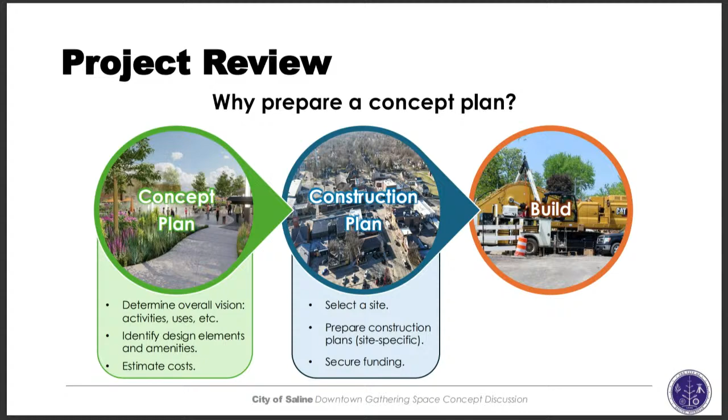So what exactly will you be getting by the end of this process? Well, as Ben mentioned, we'll be preparing both 3D renderings of the gathering space, as well as a conceptual site plan, which is a top-down aerial view of what the gathering space will look like. We'll be completing and sharing with you our assessment of the existing location options in the city's downtown, so you can account for those in making your final decision about if and when to proceed.

And we'll also be giving you some preliminary cost estimates. Through this process, you'll be identifying generally the ideal or preferred amenities and materials that you'd like to include in the gathering space, and that'll help us and you come up with some actual numbers that you can scale to different sites, depending if you pick different locations, but it'll at least give you a starting place to come up with actual cost estimates.

So when we originally proposed this project, we thought of it in 3 major steps. The first was to complete the downtown existing conditions assessment, which we've already done. The second was to hold 2 focus group meetings with elected and appointed officials, as well as downtown business owners, property owners, and members of the community to get their feedback about what they felt this gathering space should look like. With that input and in consultation with staff, we prepared a first draft of a concept plan, which we'll be presenting to you tonight.

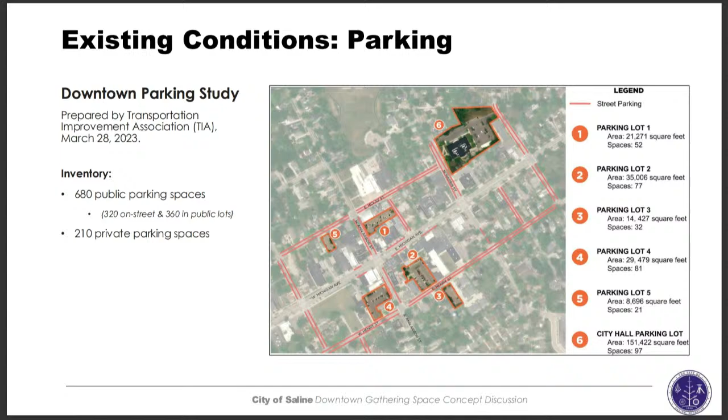With parking aside, we considered 4 major criteria when evaluating the currently available location options. The first was the dimensions and physical features. The next was pedestrian linkages, or sidewalk connectivity and accessibility. The next were encumbrances, any legal restrictions that could limit what the city could do with the property, and activation potential—is it open, visible, and could it be integrated into the greater sense of place of the downtown.

In short, in our assessment, the City Hall lot and Lot 5 are too far from the downtown center to really be activated in the way you'd want. Lot 3 is needed, as we're told, for water tower access, so that limits the use of that site. Lot 1 is relatively narrow and disconnected, being between the backs of 2 buildings on either side. Lot 2 is heavily encumbered, so using that property for anything other than parking would be challenging, which leaves Lot 4 as still being the most viable location as of now for a gathering space. So with that evaluation done, we used Lot 4 as the basis for these conceptual discussions with the focus groups.

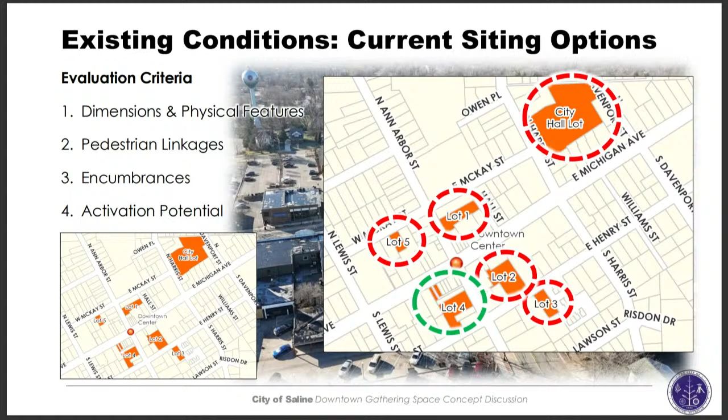We held 2 focus group meetings in March of this year with a mix of elected and appointed officials, downtown business owners, property owners, and members of the community. We started off by sharing examples of gathering spaces in other similarly sized communities, and then asked for their input about how they envision this gathering space to be used, what structures and amenities it should have, and what their design preferences were.

Between both groups, we felt the overall consensus was that they wanted it to be a central gathering space with a seating area and provided shade. It needed to be an attractive destination appealing to people of all ages, equally inviting for passive use, people walking by as they go about their business downtown, but also for events. Both groups also emphasized that it should be usable and programmed year-round.

In terms of design, both groups generally favored some kind of hardscape in the central portion of the site, again focusing on Lot 4 as a concept. Their vision was a hardscape center with landscaping around the perimeter.

They felt it was important that the site be integrated into Ann Arbor Street, and were even amenable to reconfiguring or removing on-street parking spaces on Ann Arbor if necessary to better integrate the space and make it more functional.

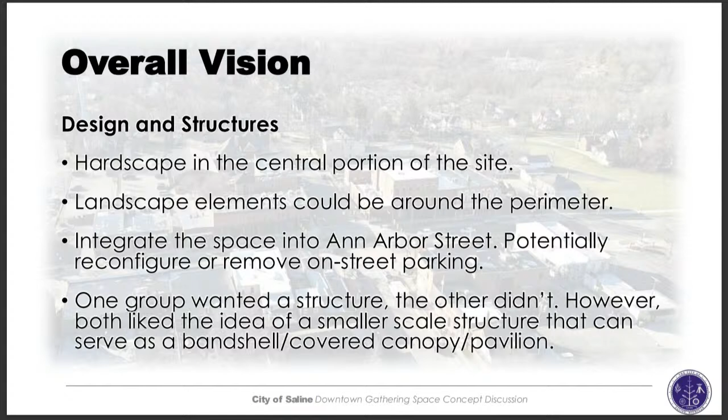The only discrepancy between the two groups was about a structure. One group preferred a larger farmer's market structure, while the other preferred just an open, multi-use flex space. But overall the feedback was fairly consistent, and both liked the idea of some kind of smaller bandshell or pavilion.

Priority amenities were water and electric service, primarily for events. Both groups thought restrooms would be great, but understood the potential cost of providing them.

Lastly, both groups wanted fixtures, benches, and planters that could not only be used for seating but also potentially something kids could play on—something unique and inviting that could serve dual purposes. Oh, and of course, Wi-Fi.

A lot of this feedback came from an exercise we call a visual preference survey. We prepared boards showing picture examples of different kinds of amenities and asked each group of participants to pick what they liked and didn't like, then discuss it. These helped us narrow down specific design elements that will allow us to generate preliminary cost estimates for you. The next few slides show photos of what the groups liked most.

In terms of a farmer's market structure, both favored a contemporary design, a smaller structure, although one group preferred just an open space that could be used for a variety of events.

In terms of structures themselves, both groups preferred a modern, contemporary look with a mix of materials—metal, masonry, and wood.

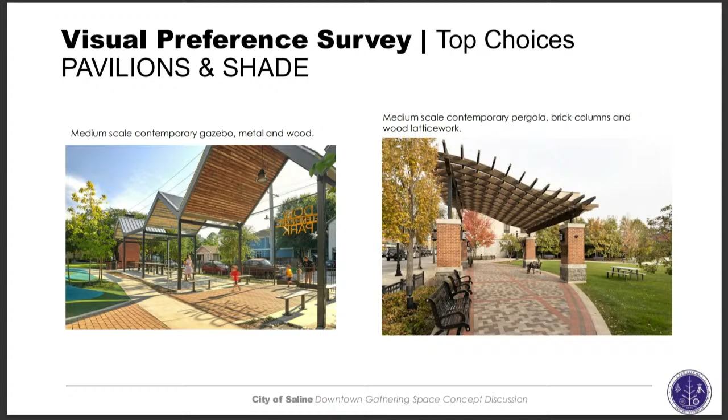Both groups favored a smaller stage structure, positioned and working in relation to a larger open space, either for seating or as a flex space for events.

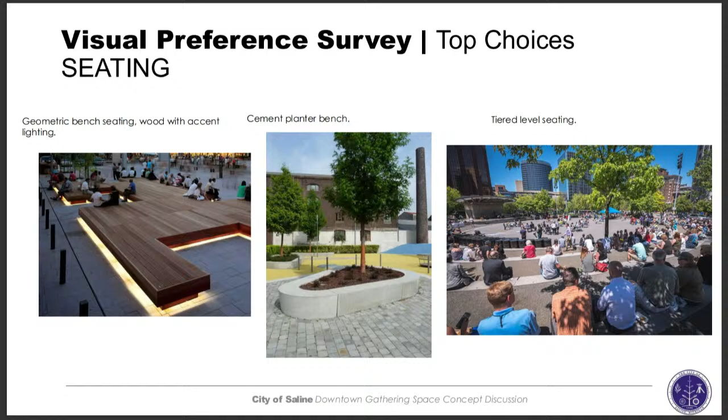These are the types of favored seating options. As mentioned, they liked the idea of a planter that could double as a bench, or a bench appealing for kids to play on, although there were differing opinions about material preferences.

Same was true with hardscape—there was no big winner there, but the takeaway seemed to be that people favored a design with a variety of color and texture.

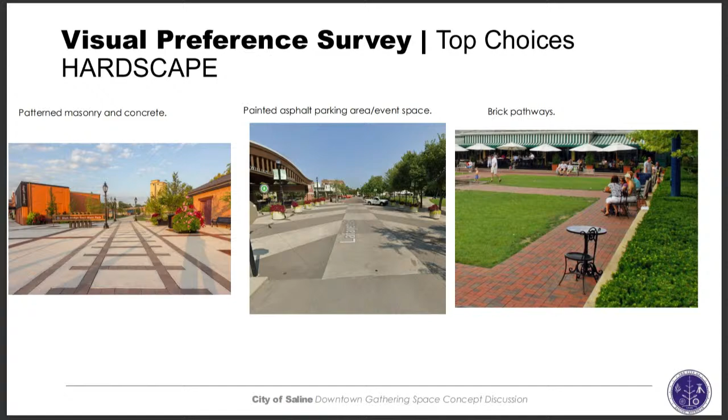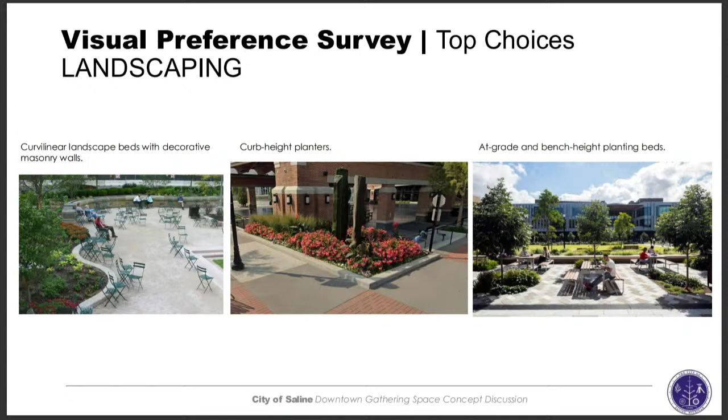So next I'll hand it off. Based on all this input, we prepared the first concept plan that we'll present to you today.

Thank you. Good evening, everybody. My name is Jennifer Morris, and I am a principal with OHM Advisors. It's nice that I actually get to see all of your faces as opposed to you looking down—that's a nice place in this presentation.

Our role here has been primarily to focus on the concept plan. Full disclosure, we are principally an engineering firm. I am not an engineer, and Rachel is not an engineer, but we have been your engineer for a long time, hence why this relationship between the two companies made so much sense. We have that background and understand the community, but we're here to get your feedback on these concept plans.

We took all the information that Mike just reviewed and started pulling together a concept plan. But then there was some discussion in the community, and we realized we needed to take a bit of a pivot and adjust our thinking to make sure it fit within some of the feedback we were hearing from our internal review team, from council, and from the community as a whole.

So what we have before you tonight, we really feel is a great approach that's going to work as you move forward into the future. And obviously, as was indicated before, it still allows you to utilize the space for some continued parking, for events, and for farmers market.

So building on that, the reason we are showing Phase 2 is to explain that there is possibility and viability to build on Phase 1 in a phased approach. If the community supports it, if it's feasible, you can continue building onto the space and really create a downtown destination that will allow more users to enjoy the space, draw more people to downtown, and have more people visiting the businesses around Michigan and Ann Arbor Street.

So the biggest change to parking and circulation is that the parking area becomes one-way and results in just 5 parallel parking spots. There's a plaza-like entry with ornamental trees from the parking area, a contrasting hardscape surface, and the eastern portion of the plaza remains the same.

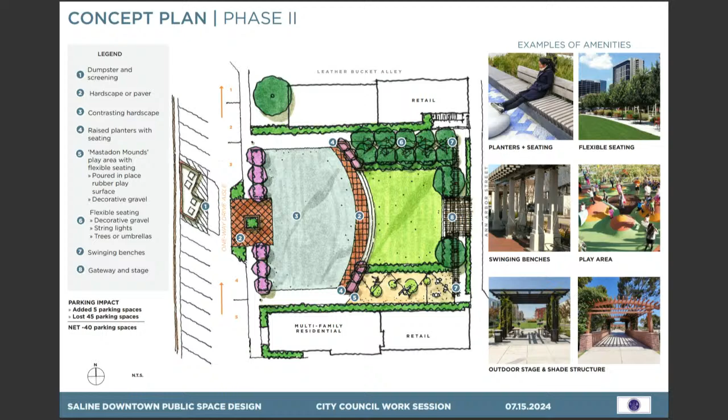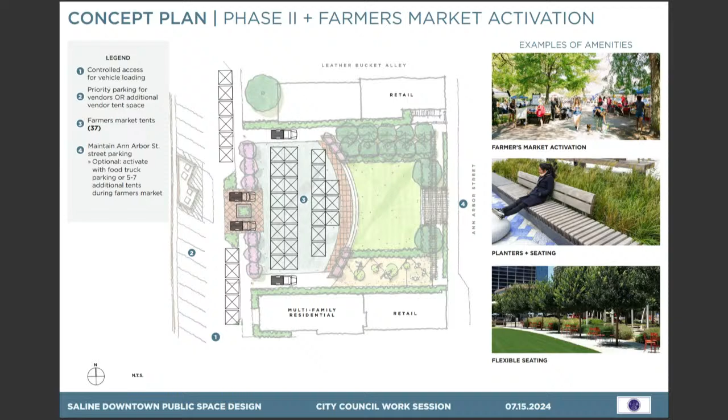And again, the 37 tents for the farmers market can be accommodated even with these changes, as well as the event layout for Oktoberfest.

And now we would like to hear from you. Let us respond to these questions, or let us know your immediate reactions and feedback.

Very good, thank you, appreciate the presentation. Mr. Harrington, I apologize for my tardiness. Is there anything you would like to add or comment on at this time before we open it up for questions from the dais?

No, I think that was a great introduction. I'd go back to the beginning of the presentation. It's very much a concept of trying to move the ball forward on what the city's talked about for a long period of time. The lot that was chosen, out of what's currently owned by the city, is the most viable. Whether or not the city chooses to do it here or acquire property and do it somewhere else, it at least gives us a better idea of what our costs are when this is done.

We'll get a cost estimate for what Phase 1 would look like, and additionally that parking cost, what are we giving up in terms of parking spaces, which I think helps evaluate the overall cost-benefit analysis of whether this would be a more appropriate or better use of our land that we own as a city downtown, as we've kind of been stuck assuming what would be great if this private property owner did for us. So it allows us to really be proactive with this planning process, and yeah, we're eager to hear your feedback.

So that is accessible. And then as far as whether it's accessible from Ann Arbor Street into the rest of the area, we have it slightly elevated. The stage is a little bit elevated, but it doesn't have to be - it can be at grade, or it can be sloped. So there are some tweaks that can be made. As everyone knows, there's a little bit of grade we're dealing with in the park, but do we have enough grade to have that step plus 2 more steps down into that secondary area? That would require an engineering analysis to really be able to fully determine that.

Okay, thank you very much for that. I appreciate that that was a factor. One of the other factors I'm wondering about is sun. Is the stage going to be directly impacted by the setting sun? And kind of understanding the orientation of it, is that the best way to do it?

Turning it that way, just understanding is that going to impede on the use of it, the timing of it, things like that? Because as you can see with some of our downtown businesses, there are certain hours of the day, especially in the summer, which is going to be your prime thing, where as the sun is setting, if you're on the wrong side of the sidewalk it's a bit brutal, to be honest. So just sort of understanding the orientation of it. I know right now, utilizing that parking lot, Main Street actually has a stage where you would have your number 6. So it's going the other direction, so you don't have sun going into people's eyes.

Can I just comment on that real quickly? The stage that we're talking about at that entrance is really just kind of dual purpose, and it's intended to be, maybe you have a street performer, or maybe you're bringing in someone from the community that sings and plays guitar, or whatever the case may be. It's going to be something that's smaller, more low-keyed. And there is a pergola to help with some of that shading effect. But because of what we were trying to achieve with the phasing, that was in part why we put that stage there. But obviously your event stage for your major events would still be at the back end, facing the east.

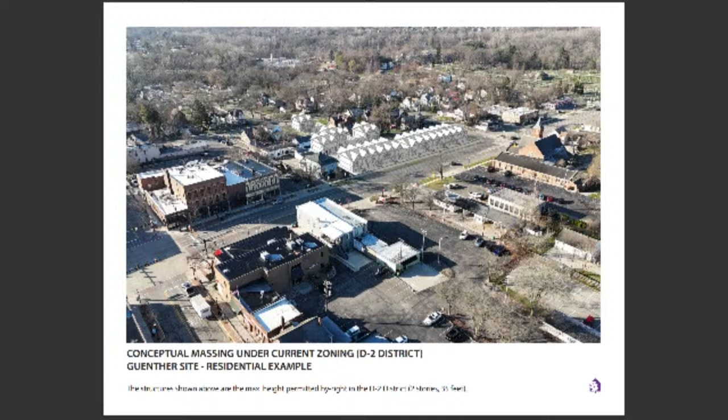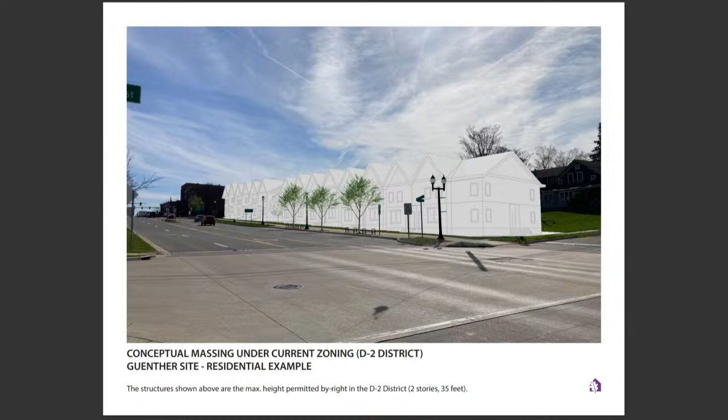So you have the townhomes essentially massed together that would front Michigan Ave, and then likely a parking area in between. This is another same photo from the street view. You can see they'd be just a little bit taller than the existing street lamps on this site. Because of how that grade dips, they would appear shorter than the buildings immediately adjacent to it, which are the 109, Benny's Bakery, and that set of buildings.

Under the alternative example of D1 zoning, you would probably switch from a townhome model into a more traditional mixed use, something that would be more closely aligned with the existing buildings on the immediately adjacent sites of Benny's Bakery, again looking at those older brick buildings.

Going down to the street level, you can see they'd be a little bit taller, and with the grade, they would probably peak up to about what the existing big historic buildings are. Again, you're looking at a 3-story building, probably with a good amount of windows.

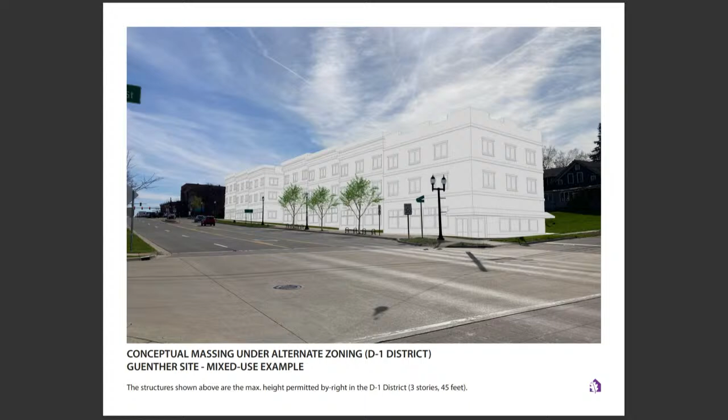We have a pretty large transparency requirement in our downtown form district that requires 50% of the front facade to be either glass, public art, or something else that meets the intent, as determined by the Planning Commission.

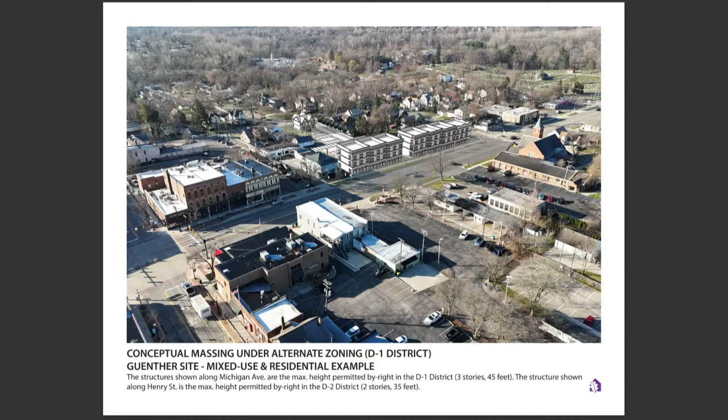I think notably, it's kind of hard to see, but these buildings are all smaller than the steeples that define the current characteristic of downtown Saline. We have a lot of these historic churches. None of these buildings under the current provision of the code would be taller than any of the steeples in our downtown.

Looking at Hall Street and McKay Street, it's a little bit more unique. This is right next to the existing Presbyterian Church. So looking at East McKay as well as Hall Street under the D1 example.

Again, you're seeing these taller buildings. They would stay below the existing steeples, but definitely provide a little bit more density and activation on Hall Street compared to the 2 houses that are currently unoccupied, the surface lot, and the prayer garden.

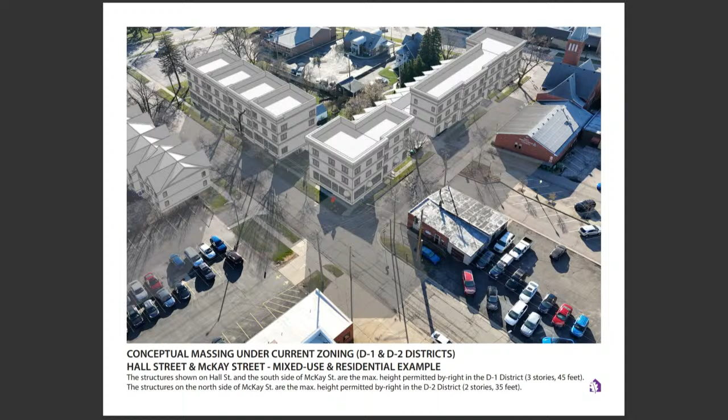Here's another visual of what that would look like staring down Hall Street, of how tall this building would kind of feel comparative to the church in the background, the water tower. It'd definitely be a departure from the current house that's there, but this is currently allowed by right if someone were to choose to come and buy one of those homes from the Presbyterian Church.

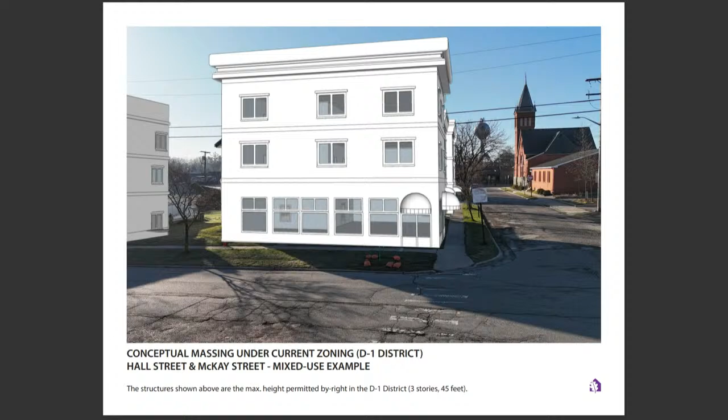Moving on to Harris Street and Henry Street. This is behind the Speedway where One Stop Soul Shop used to be, and next to Klingberg. It is zoned D1. We were trying to match the traditional residential district, so it's shown more as a pitched roof concept rather than the flat roofs you saw on the other ones. So flat roof there, pitched roof here.

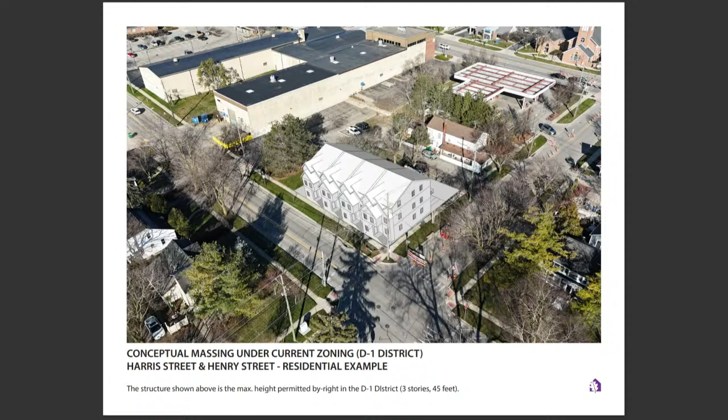So probably more like a dense townhome development, maybe a 3-story quad or eightplex essentially. Again, that's allowed by right, it is zoned D1 already. Whether or not someone would choose to build this, given the other economic conditions, is a question, as is where they would park. There is some parking provided on the back, but those are obviously considerations as well.

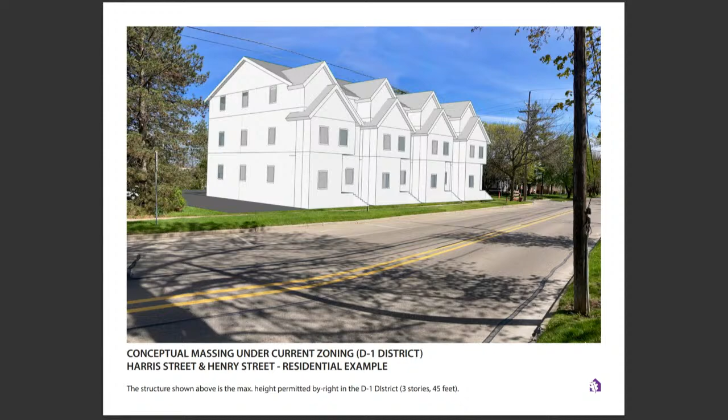Again, this picture is just shown to give you a concept of really how tall these buildings will be. If you look at the Berwick condos, for example, it's a little bit taller than that, but not quite as tall as the Wexford condos, which have that tuck-under garage that really gives it some extra elevation. So that's not how we have these shown, and they still stay underneath the city's height requirement, and they have that front green area setback as well.

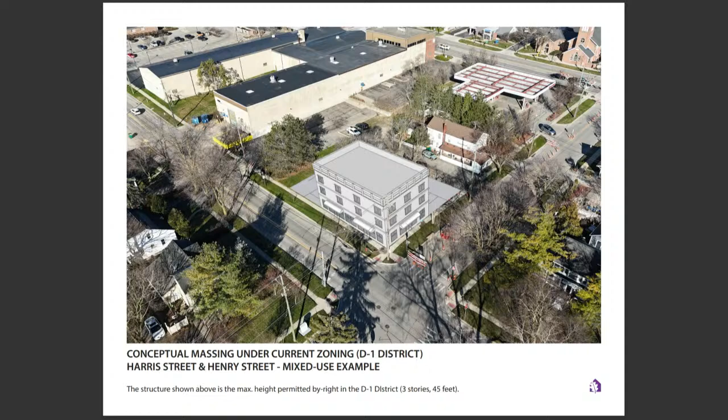Looking at what it would look like as a flat roof, you'd probably need to provide more additional parking in that immediate vicinity. Again, there's no other city lot that's necessarily next to it. More of the same.

Looking again at McKay and Hall Street, a combination of D1 and D2 zoning. This is more across from City Hall. You can see City Hall in the bottom corner here in our little plaza. I believe that home is currently owned by the Evangelical Lutheran Church.

But if that whole block essentially out that window is redeveloped and we modified the zoning to allow the D1 and D2 districts there, you would see probably denser townhomes with more development. So this is, again, what's allowed underneath the code already.

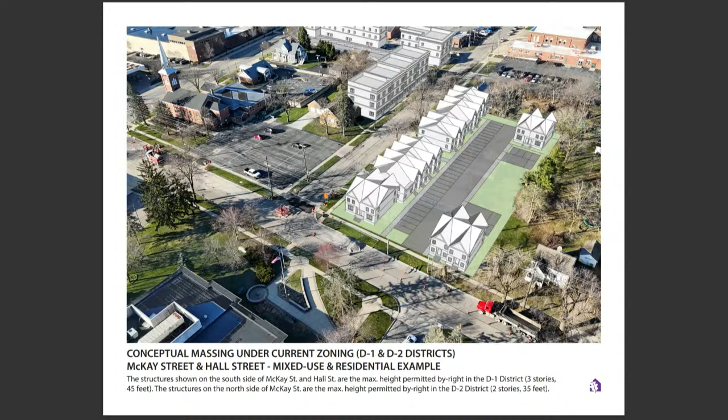And essentially, we're just going through these. If you have thoughts or ideas, if you like the density that you're seeing, if you don't think that it's sufficient or tall enough, that's the feedback we're getting. We're at a very preliminary stage. We're going to go through this with the Planning Commission as well, just to show you it. There's no hurry to get feedback on this item. It's just something that we were funded to do to see what it would look like and go from there. That's the end of my presentation.

Very good, thank you. Again, not required to ask any questions or make any comments at this time, but if you'd like to, we would welcome that. Mr. Lesh, or Councilmember Lesh, you have 5 minutes if you'd like it. Nothing at this time. Okay, very good. Councilmember Seal? Nothing at this time.

Mayor Pro Tem Dillon? Thank you. I appreciate this, I'm a very visual person, so it really helps me to see what's going on. I guess for me, understanding as we start looking at this, and just to be very clear, this is not an eminent domain situation. We're not looking at taking properties, so people watching don't need to panic about this. But when you look at some of the bigger pictures, maybe the one at the corner of Harris and Henry, would we look at redeveloping that entire area, like where One Soul Shop was? Is that also zoned the same way?

Yep, so that whole block is zoned in the D1 district. And I guess to your point, you're right, the city's not looking at eminent domain. This is if a private party were to buy any of these properties today, they could develop this by right. They would have to go through a site plan process with the Planning Commission to confirm it meets the standards. But essentially, we're saying that as of today, someone could buy any of the properties shown and do these products more or less without much issue or animosity with the city.

Right, so yeah, I mean, I think that it's a great idea. I do like the idea of keeping the residential character in the streets that have more of a residential feel, with a pitched roof versus the flat roof. I think that seems more of a Main Street kind of approach.

Right, and I think that's exactly the type of comment we're looking for, because we're in a position where the state of Michigan has granted us some dollars to potentially evaluate aspects of that, and even small design tweaks, like saying immediately adjacent to residential, the roof type has to be different. That just provides us a little bit more criteria to evaluate proposals, because we could stand to beef up our form-based code to make it more about form. Currently, we're half use, half form, and that's not necessarily the best position to be in.

So my biggest question for you is, so we would have an increase in housing, what are we going to do with parking? I see that you've got surface lots around these things. Is that really the ideal situation, to get into having more pavement? I mean, is it, creating a structure somewhere that you're going to sort of have a collective parking?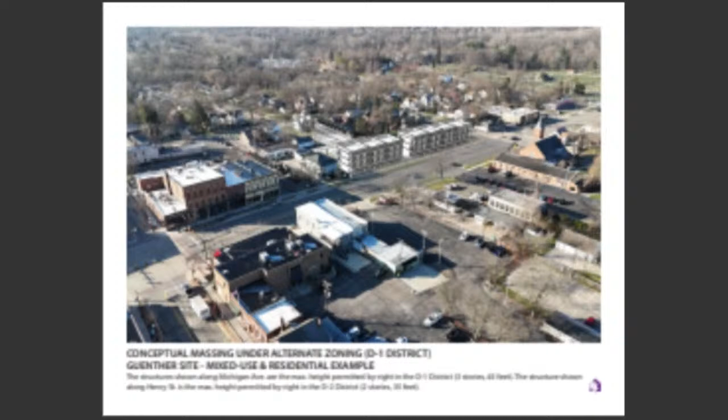Thank you. Unequivocally, I'm very much in favor of concept 2, which would be more of a mixed use for that parcel along Michigan Ave, where you'd have retail, office space, professional office on the ground level with apartment, condo, loft living on a second or third floor. Absolutely, I feel very strongly about that. Now, that was proposed many years ago. That development, for a variety of reasons, floundered, but conceptually, I think that would be good for that space and good for the downtown.

Mr. Gearbaugh, any questions or comments? Yeah, and thank you for bringing forward the vision I've been looking for the last few years, trying to figure out what we would do downtown, especially when you look at McKay Street and some of these other properties. Because the realization is that if we're going to grow as a city and provide for more users and address all the other things, we're going to have to start looking at the areas where we want to see this kind of development.

When you look at this example, we've talked about 0 lot lines and some of these other things. So the example on McKay Street, where you have the houses on the other side of the sidewalk, would you change that even further, make it more urban by basically removing some of the green space? There's a variety of trade-offs to consider. I am more of a fan of the 0 lot lines on Hall Street, but I do think as you get more into this end that you can see right out the window, it makes sense to transition more to residential.

Obviously, the city does not exercise a 0 lot line with our city hall. Granted, things could change if we chose to expand or modify the city hall operation, but those are all options and considerations too of what yard space we really want to see. That was also noted in the master plan for the Central Village District, that you need some walkout—the goal is to have connectivity with the sidewalk right out your front door to create that more dense community feel.